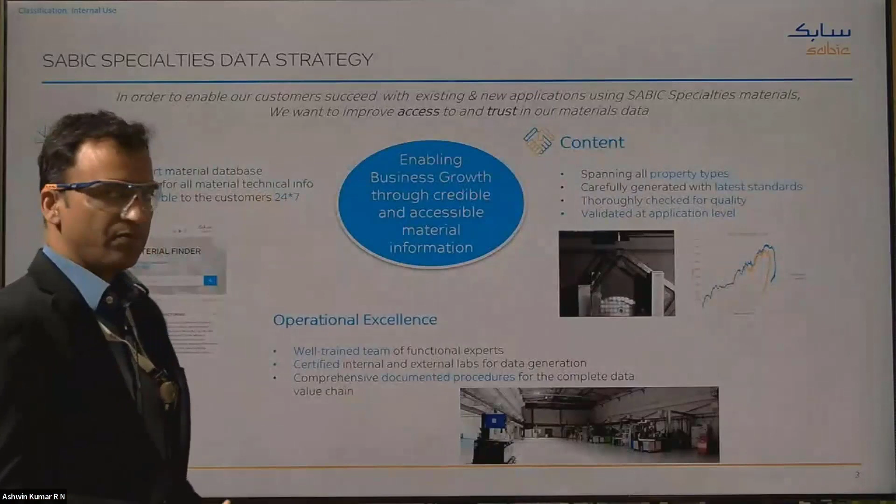Within SABIC, we have 4 main business verticals, and the vertical that we belong to is known as the SABIC Specialty business. This business is dealing with the high end of the resins, additives, and compounds. We have products like Ultem and Noryl resins and LNP compounds. In the specialty business, we have a very clear and focused strategy to really serve our customers' data needs.

The strategy is very simple: we want our customers really to succeed with their applications and our materials. And how do you do that with our data? It is by improving the access and trust in our data. So we have three clear strategic pillars to achieve this. One is to have the right system, to have the right content in the system, and have the right operational excellence.

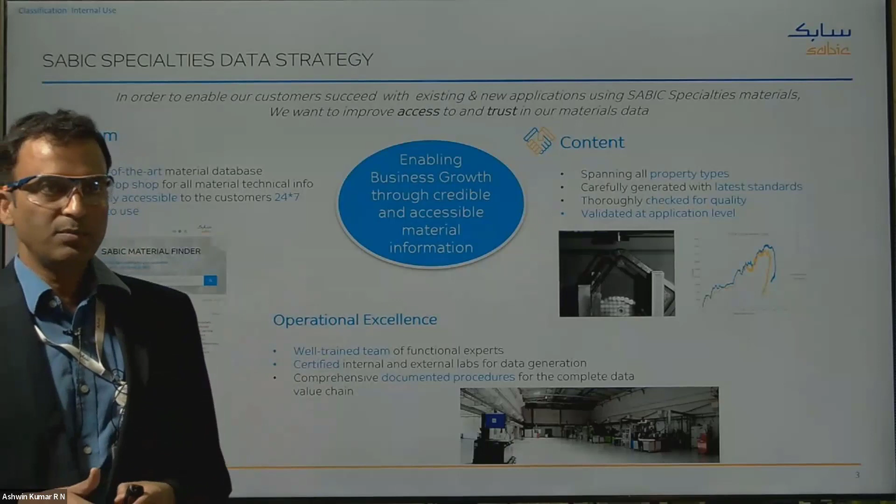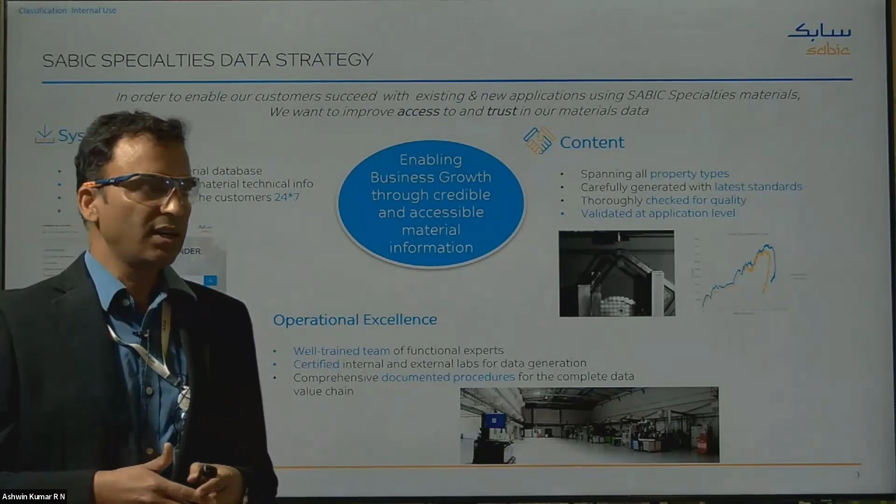For example, for the right system, we have a very state-of-the-art database which is called the Material Finder, which is accessible to all of you 24/7 through our website, where you can find all types of data, and this data is generated very thoroughly by the lab that we have here in Bangalore. This data spans all different property types, is carefully generated with the latest test standards, and it's thoroughly checked and validated even at the application level.

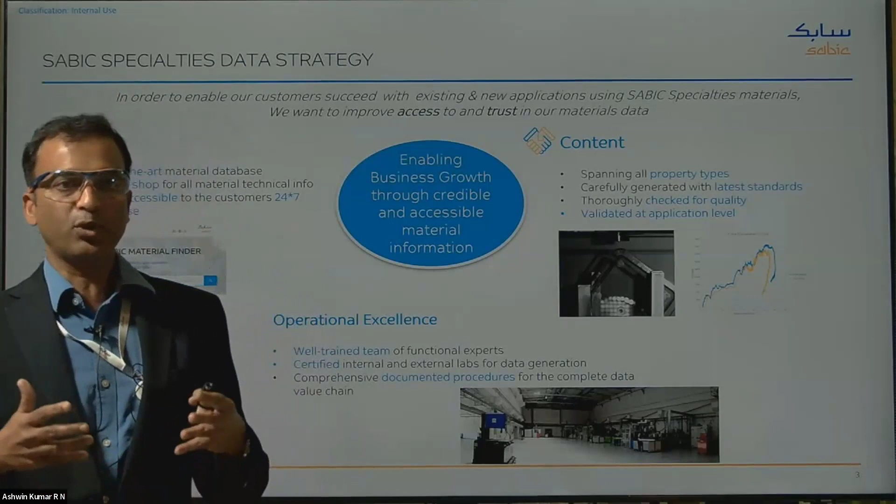And as far as operational excellence is concerned, we have a very well-equipped lab with very highly experienced experts who follow very well-documented operating procedures to make sure the data that you get is good for your simulations. As far as the Material Finder is concerned, I would like to tell you a few quick things about it. It's your one-stop shop to find the right materials for your applications from our portfolio.

So this Material Finder can help you to quickly search and find the materials using a lot of different types of easy-to-use search filters. You can also use a free text field to find the materials, and once you get the materials, you can also find out what are the different use cases that are possible with our materials.

I would recommend that you register on this tool to get more out of this portal. Once you register in the tool, you can get access to multi-point material data and the CAE cards, so that you can confidently do the simulations. In addition to that, you can also get molding guides, design guides, and secondary operation guides.

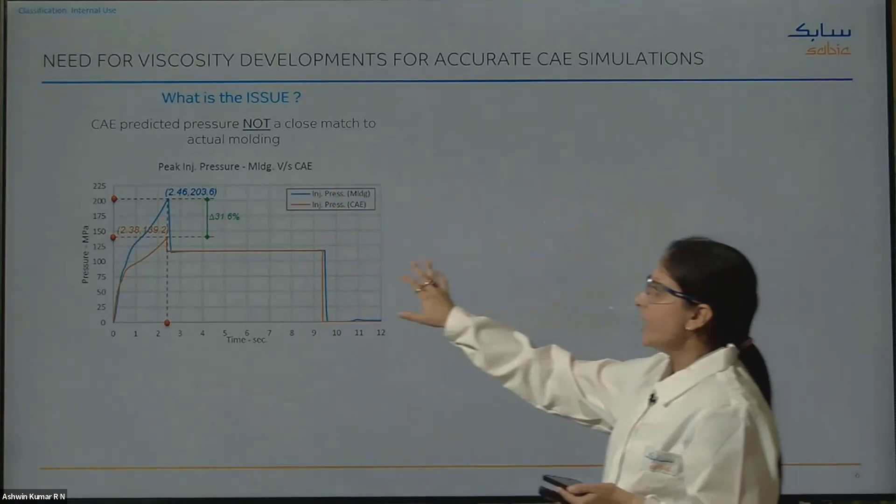So I'm talking about why we need viscosity developments for accurate CAE simulations. We have a graph of pressure and time, and the blue curve here represents the actual injection molding pressure that is experienced inside the injection molding machine in the cavity. And the orange curve represents the CAE simulated or predicted injection pressures.

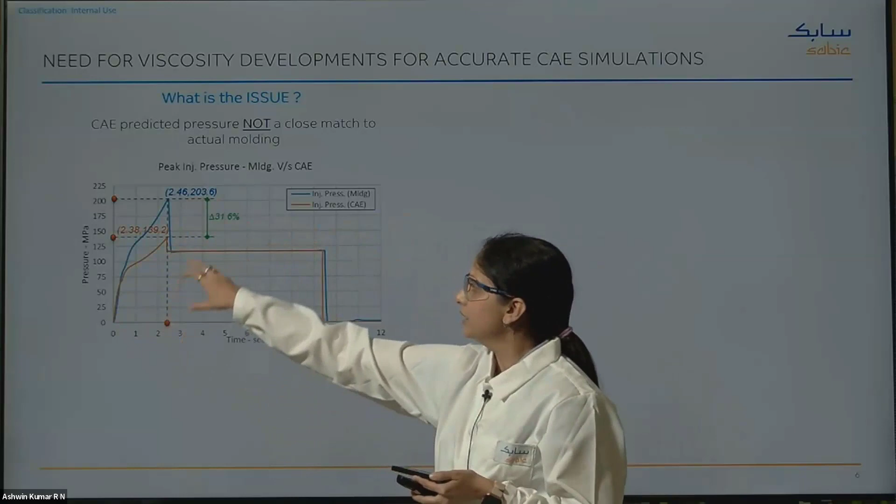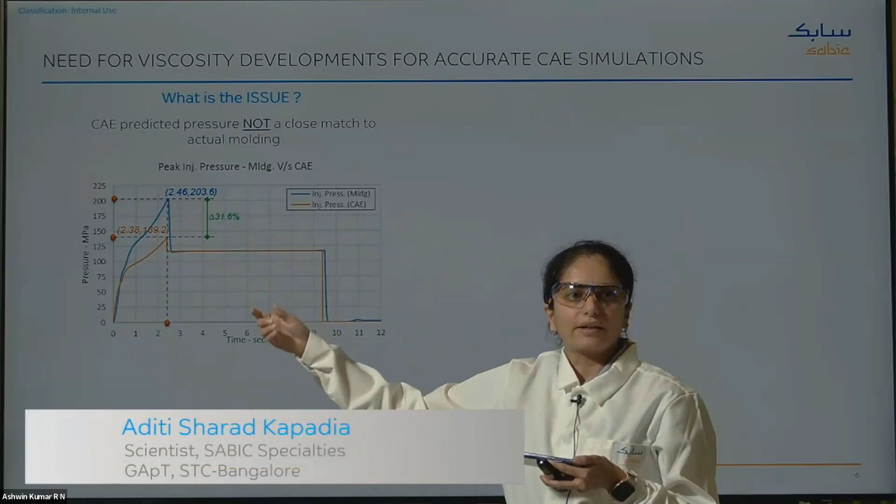We see that there is a gap between the actual injection molding pressure and the CAE predicted values, a delta of about 31.6%. So we need to address this issue in order to give a better prediction to our customers and enable them to have a better way of characterizing the injection molding pressures.

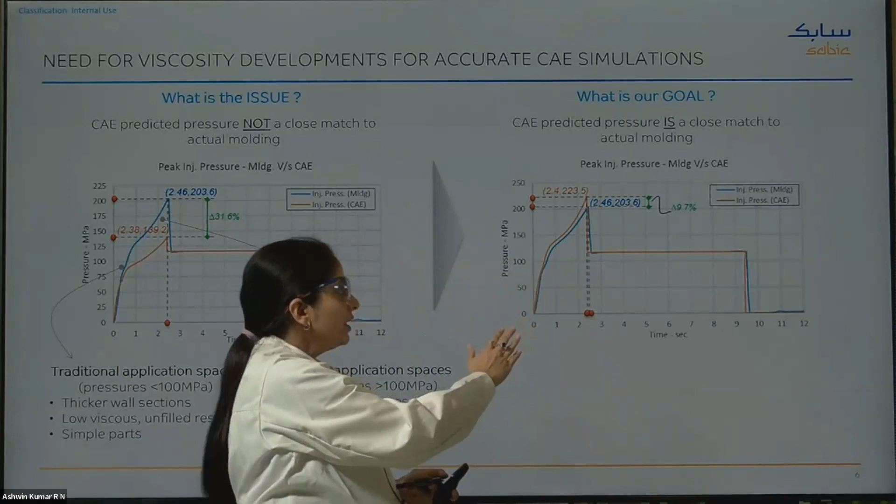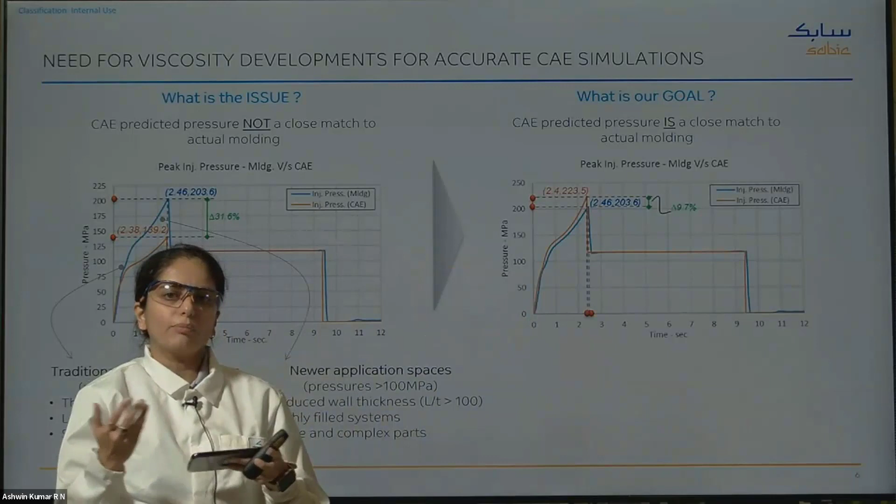So what is our goal? Our goal is that the CAE predicted pressures should be a very close match with the actual injection molding pressures which are experienced inside the cavity. So we have devised a method, and we know what kind of parameters will influence this. So we have come up with a methodology to show how we can bridge this gap between the actual injection molding pressure and the CAE simulations.

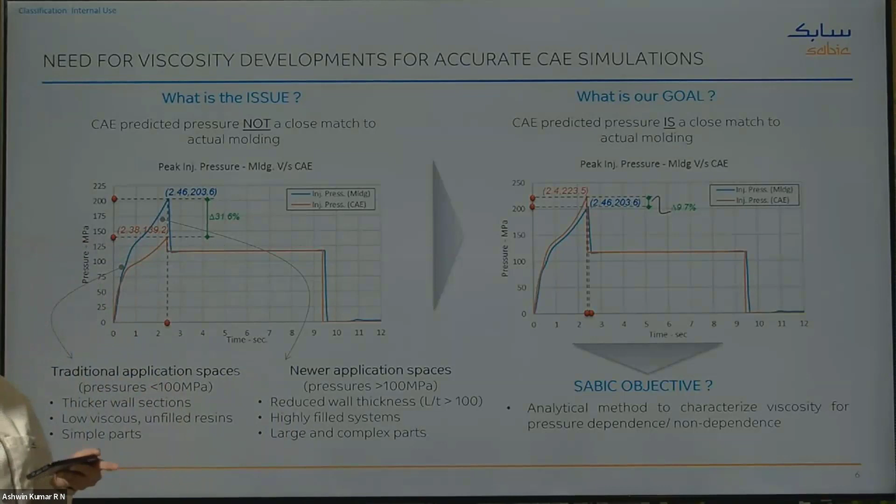So the question arises: where are these things important? When we have newer applications which require pressures greater than 100 MPa, which is not conventional, where there is reduced wall thickness, a highly filled system, or maybe large and complex parts, we need this kind of methodology to bridge the gap between injection molding simulation and the actual injection molding process.

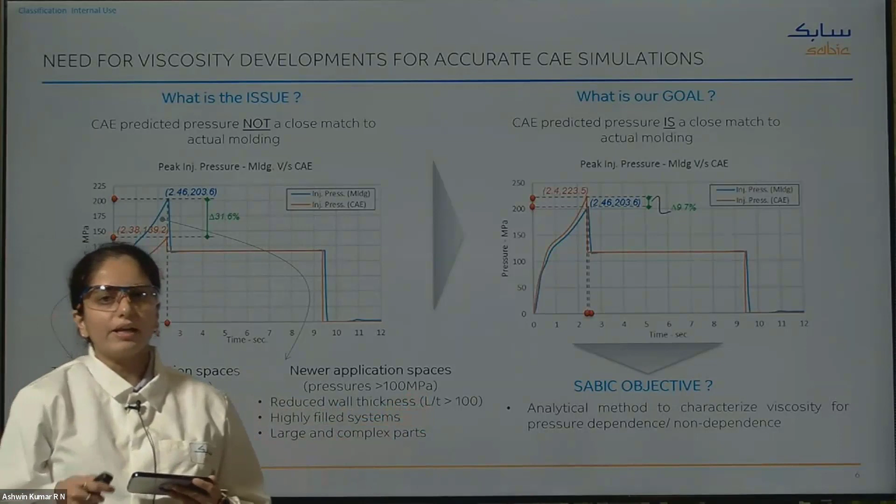So there is an analytical method available wherein we characterize the pressure dependency parameter, also known as the D3 parameter, which is a parameter of the Cross-WLF model widely used in injection molding simulation software. So it is very important to know the pressure sensitivity of the polymer melt viscosity, and this is required for an accurate CAE simulation, and we need to understand this for high pressure injection molding processes.

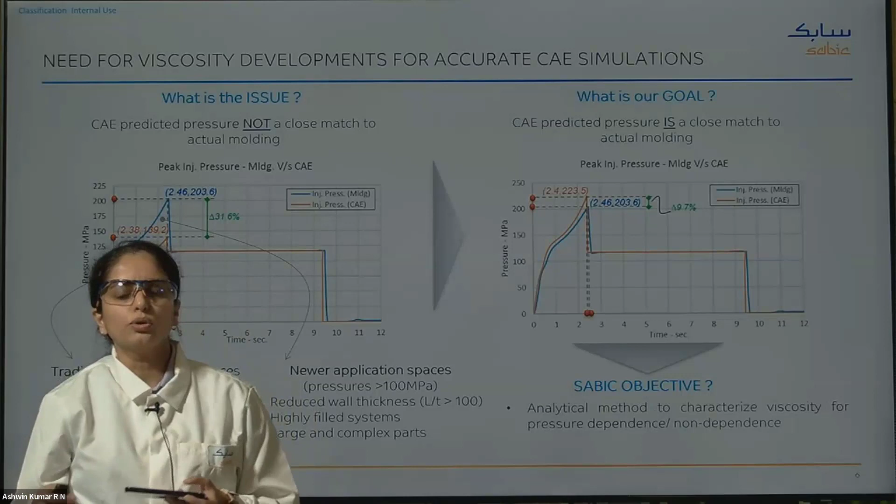So I will be covering the method to determine the D3 parameter in this webinar, and it is done by combining rheological techniques like the dynamic technique as well as the capillary rheometer technique. When both these techniques are combined, we can measure the D3 parameter. So what does the dynamic data contribute?

So dynamic data contributes to 6 out of the 7 parameters of the Cross-WLF model, and we need to have the 7th parameter, which is D3. So how do we go about that? D3 determination is done with the help of a capillary rheometer, which is fitted with a counter pressure cell, and this measurement is carried out so that we know the pressure dependence or the influence of pressure on

the polymer melt viscosity. The Cross-WLF parameters are then validated with the help of the injection molding process with a box tool, which will be covered by my colleague Ashwin, and then the results between the actual molding and the CAE simulations are compared. So a comprehensive rheological characterization is required in order to understand the influence of not only shear rate and temperature, but pressure on injection molding.

So the Cross-WLF model is widely used in simulation because of its simplicity. And what does the D3 parameter tell us? It tells us about the changes in glass transition temperature due to the applied pressure and the increased melt viscosity. In most material data cards that you will encounter, you will find that the D3 parameter is either missing or not evaluated at all. So how can we account for this D3?

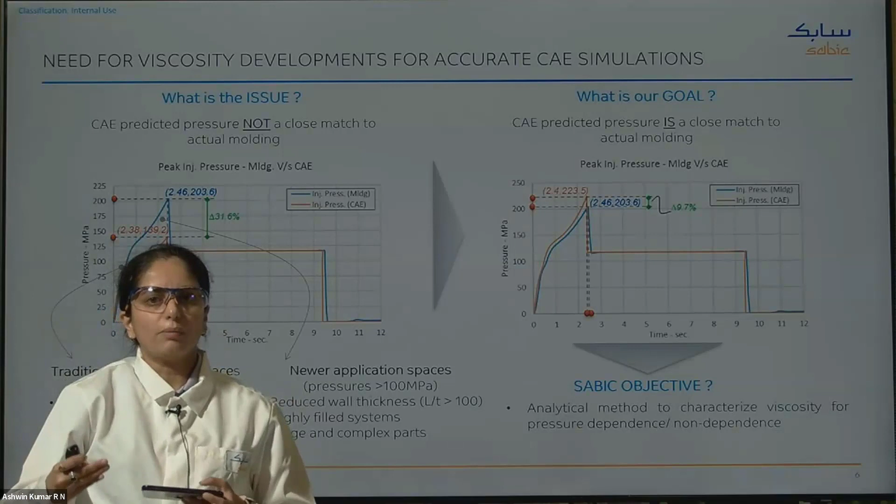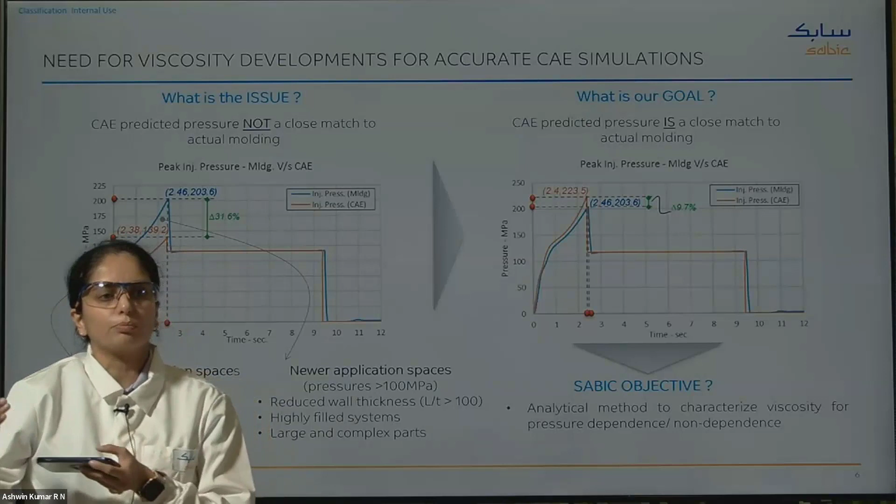So when we measure D3 and give this material data into our material card, what could we avoid? The customer would be able to select the right injection molding pressure limit for the injection molding equipment. He could choose the right machine for himself, and we could also avoid erroneous mold design, which could lead to part rejections, insufficient part filling or lower part performance. These things could be avoided when we account for the D3 parameter.

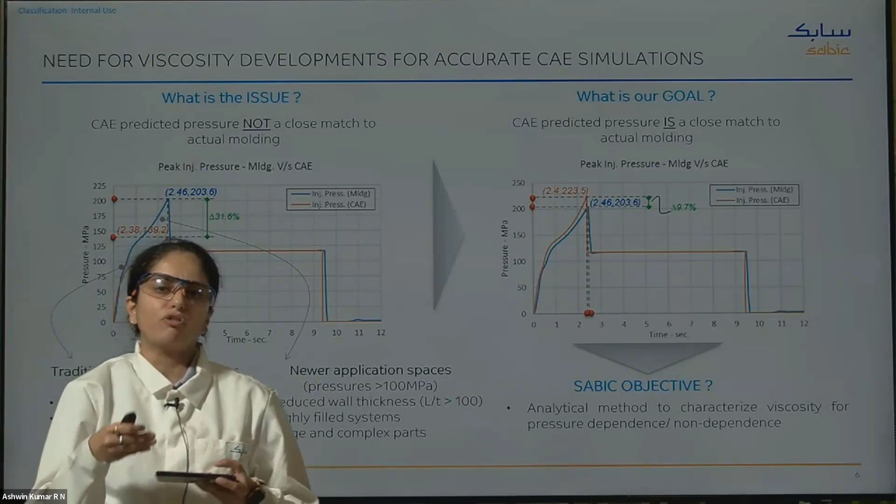So with the current method where we measure the D3 parameter, we see that the effect is a convoluted effect of pressure as well as of the high shear rates which are encountered inside the capillary rheometer instrument. So I'll talk about what exactly we are doing. Viscosity parameters at high shear rates are influenced by pressure, and we need to decouple the effects of pressure. If not, the results will be erroneous.

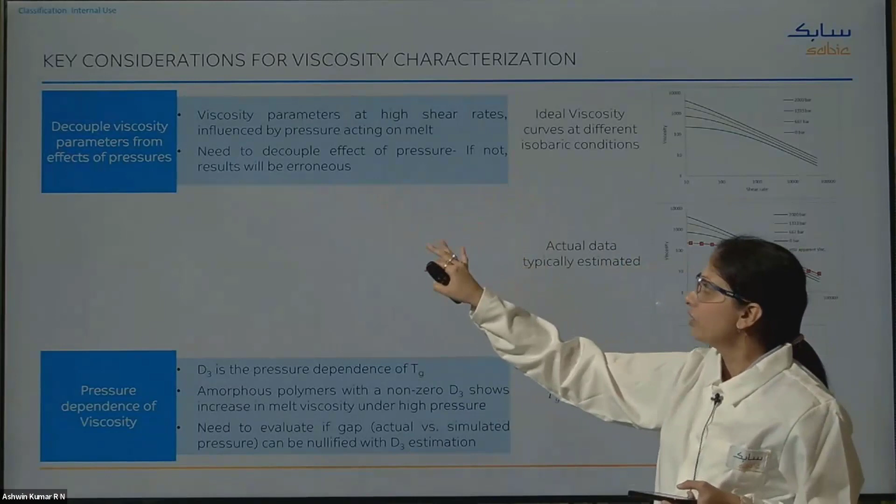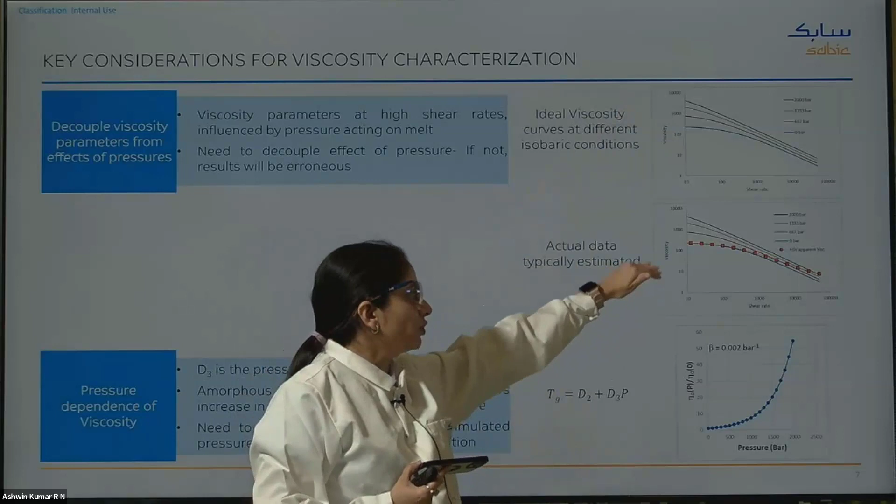So here we see a representative graph of viscosity as a function of shear rate measured at different isobaric conditions, where we have 0 bar, which is the ambient pressure, and then the higher pressures. We also have estimated data with apparent viscosity, which is converted from the measured viscosity. It is fitted onto the measured viscosities, and we see that it gives a good correlation.

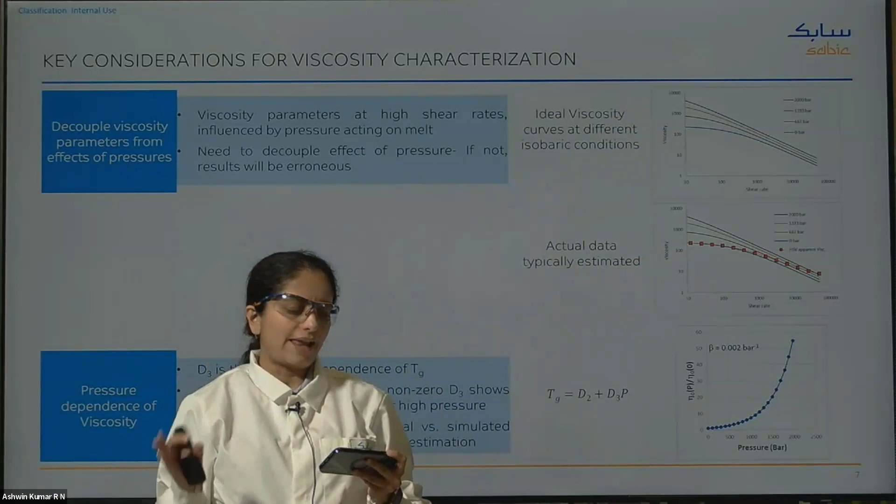So what exactly do we do to determine this D3 parameter? Currently we have a method to address this effect of decoupling the shear rate from the pressure during characterization. Dynamic rheology is used to measure the viscosity at 0 pressure, and the polymer must fulfill 2 conditions. The first condition is that it should follow the time-temperature superposition principle, wherein you can generate complex viscosity master curves.

And the second condition is that the polymer needs to follow the Cox-Merz rule, which is a simple relationship wherein we correlate the steady shear viscosity with the complex viscosity as a function of the angular frequency. So by achieving these 2 conditions, that is the Cox-Merz rule and the TTS, we can have this D3 characterization.

And I would also like to touch upon the WLF model, which mostly describes the effects of temperature on viscosity. In an injection molding process, when the pressures are above 100 MPa, we need to account for the increased Tg, the reduced free volume, and the effects of pressure. So combining the WLF and the Cross model, the effects of temperature and pressure on the zero shear viscosity are accounted for, and then the effect of shear rate, which leads to the shear thinning of the melt viscosity.

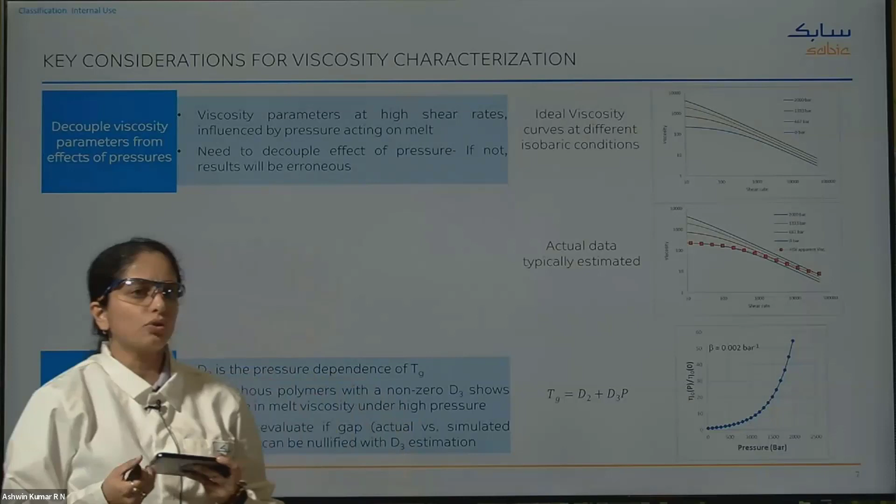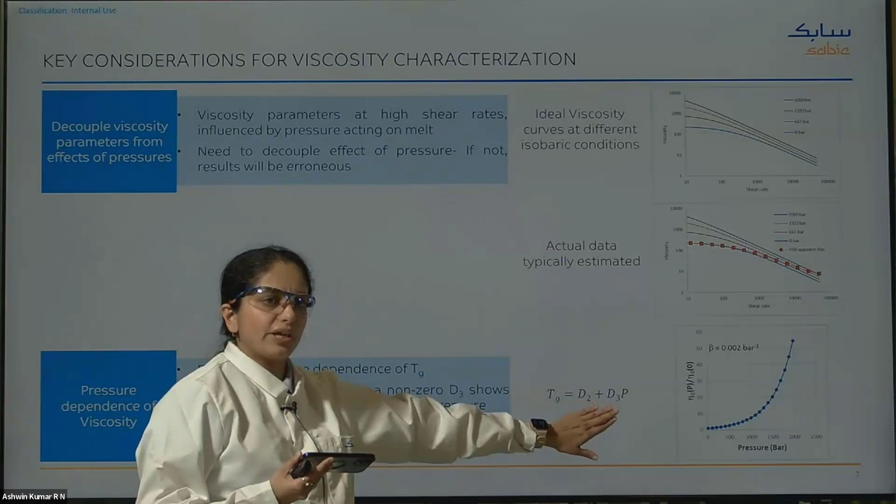So all this can be correlated with the help of Poiseuille's equation, which is generally used to measure the pressure gradient inside the capillary rheometer. So in short, we are accounting for the glass transition temperature, that is the D2 parameter of the Cross-WLF model, and we are adding the D3 parameter along with the pressure component. So we are now considering both the pressure dependence of Tg and the glass transition temperature itself.

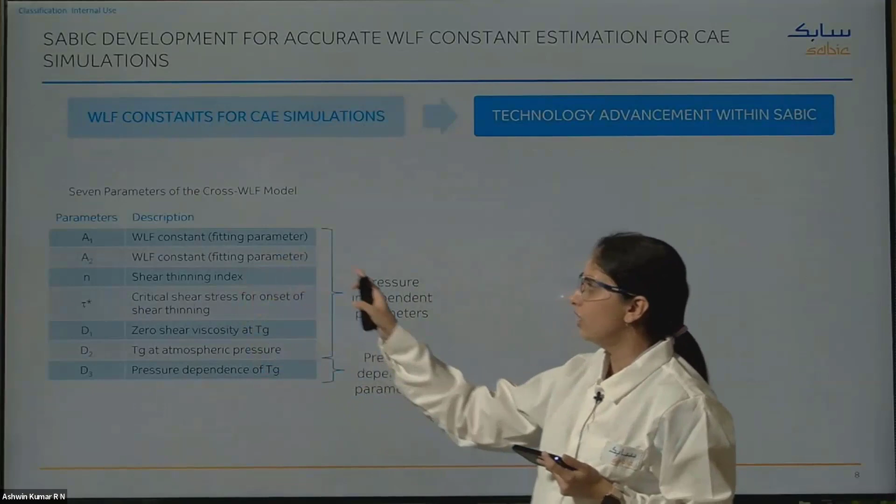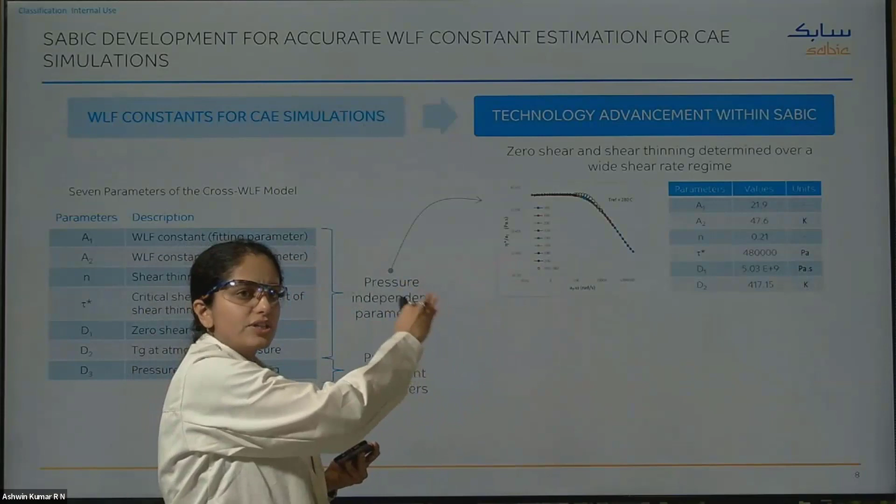So this is how we will cover both the factors. And then we talk about the 7-parameter Cross-WLF model, what each constant means. The meanings have been given on this slide. And then we have this master curve, which is generated at a particular reference temperature, first different temperatures and then a reference temperature. And then we have this methodology to determine the D3 parameter, wherein we have the pressure gradient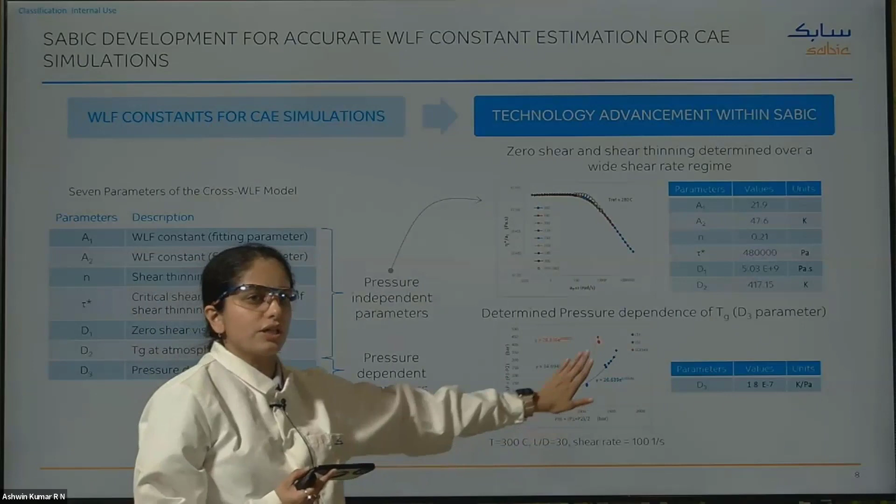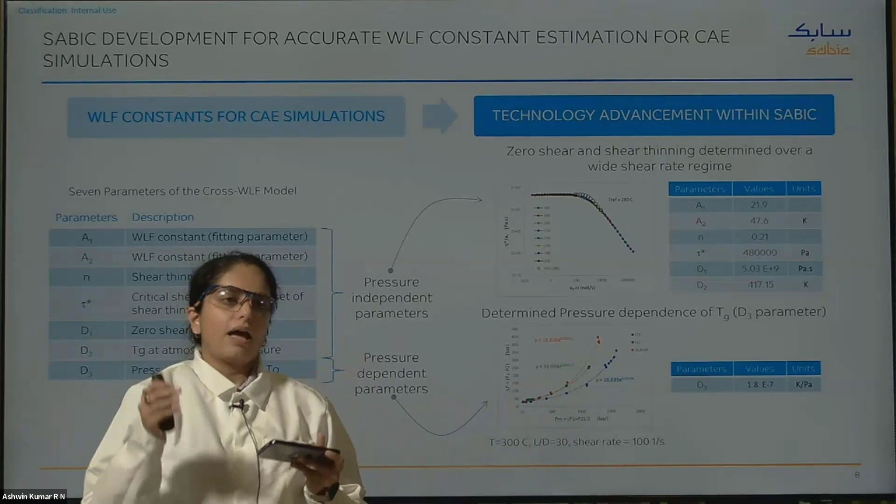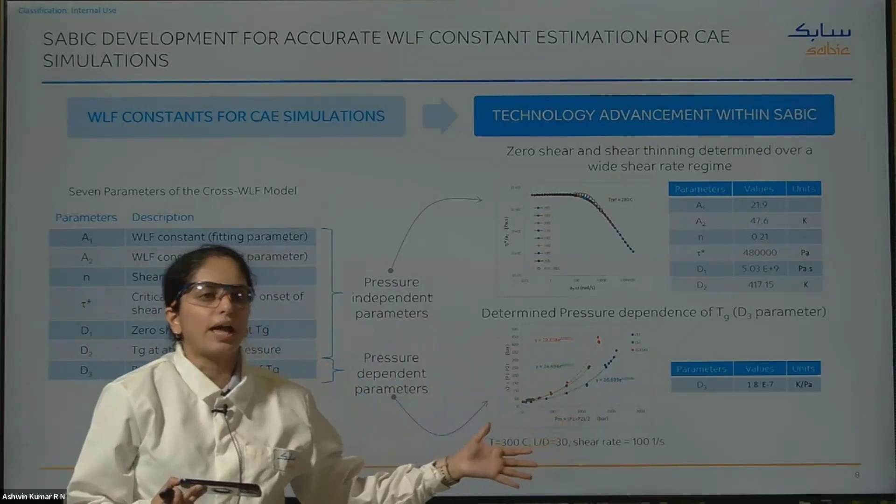versus the average pressure. And we see that the melt viscosity is influenced by pressure. So it goes on rising continuously. So we have this counter pressure measurement device wherein we capture the influence of pressure on viscosity, and this is done at a constant shear rate of 100 per second, which is in the Newtonian region of the polymer melt. And this is applicable for the amorphous polymers as well. And then we can characterize our pressure dependence coefficient beta, which leads us to the calculation of D3 parameter, which is given in this slide here.

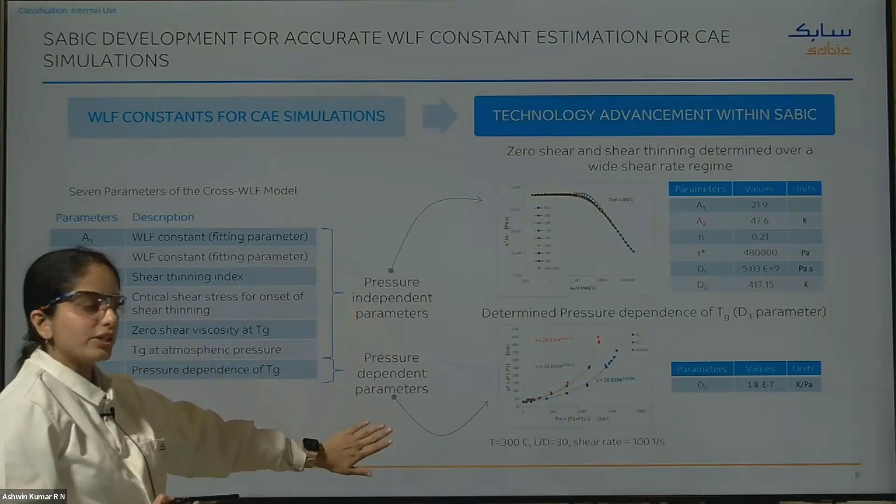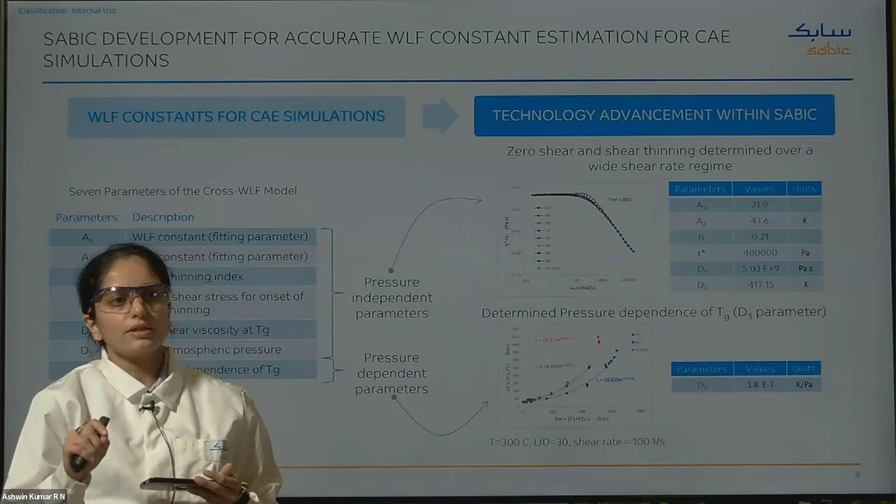So I would like to summarize here that the effects of pressure and shear rate can be decoupled, and then we can have our D3 parameter evaluated. There are some pressure independent parameters and pressure dependent parameters, and we can arrive at the 7 parameters of the Cross-WLF model and provide more complete data in order to characterize the CAE predicted injection pressures and the actual injection molding pressures, and we can bridge this gap by about 10%. So this is our finding, and I would like to hand over this stage now to Ashwin to explain the further molding validation studies. Thank you.

Thank you, Aditi. Very nice. Thank you, Aditi. Just a quick mic check here. I hope everything is working fine. Sounds good.

My name is Ashwin. I'm an application development engineer in SABIC Specialties business, focusing on part design, tool engineering, and the molding process engineering. Today, I'm going to demonstrate the molding process from where we took the boundary conditions into the simulation environment and try to understand how it correlates. And helping me today is my colleague here, Senthil, who is an expert in the injection molding process. So today we are molding Ultem 1000, which is one of our products from the high heat portfolio, which can retain its mechanical properties even at high temperature.

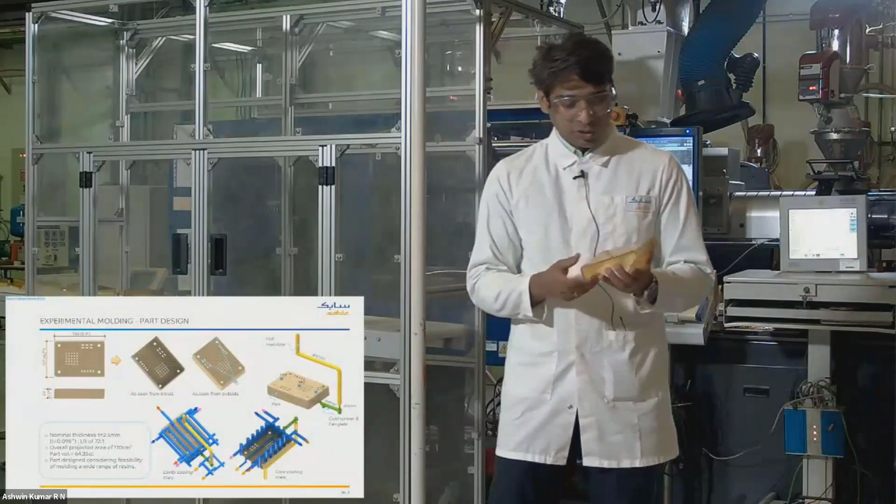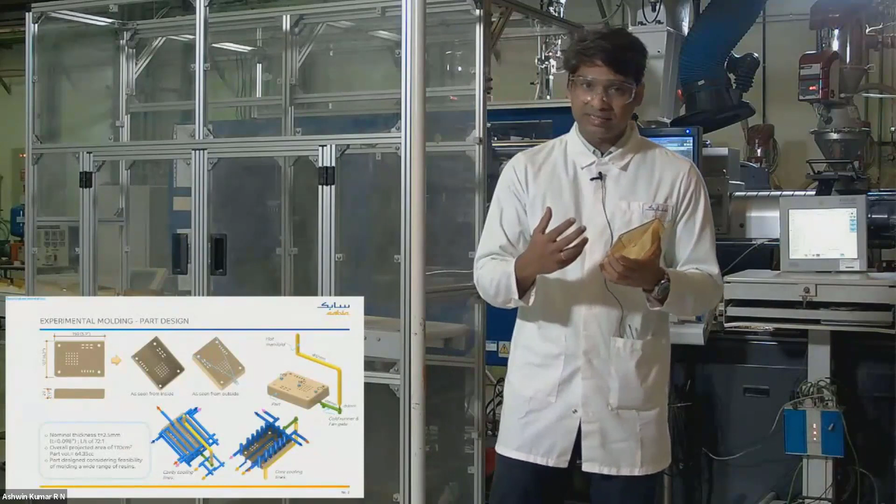So let's quickly jump into what's happening here in our lab, right? So to understand this molding process, we have come up with a representative design of the part. That's what I'm holding here in my hands today. So this is a kind of a boxy shape with one side open, as you can see here. And we have intentionally designed some flow restrictions to understand how the viscosity of the resin influences the filling pattern because of these restrictions. And this is about a uniform 2.5 mm thick part with about 220 by 160 kind of a length.

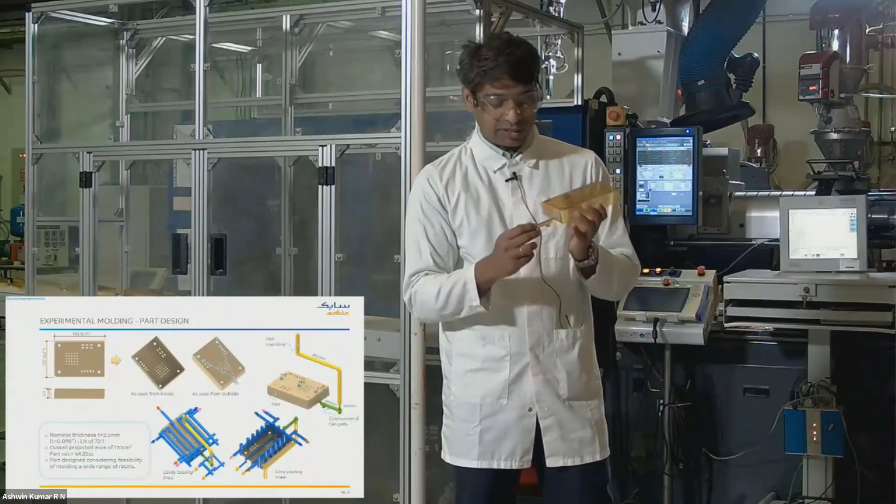And to mold this part, we are using an edge gate kind of a scenario here, which is basically a combination of hot and cold runner. And you see we have a decent edge gate with a trapezoidal shape of runner with a small cold sprue, which is fed by the hot runner, right? And another important thing I want to highlight: while we were developing the tool for this design, we have given a lot of emphasis to make sure that the part forming surfaces in the tool are maintained at a very constant temperature, right?

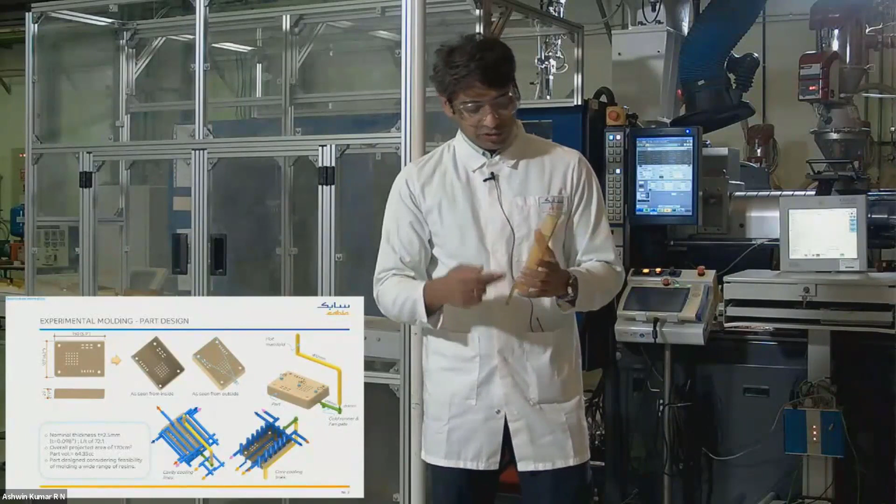So for that, we engineered the cooling channels in such a way that the temperature variation between the two halves of the mold and also even at the same side of the mold is less than 1 degree, right? So for that, you can just look at the screen, the small screenshot there. So there are baffle coolings within the core, and surrounding the core is another cooling channel. And on the cavity side, there are additional 2 cooling channels which are trying to maintain this temperature altogether.

And another important thing I want to highlight here is maintaining the temperature at the hot runner. So we have a separate cooling channel designed in the tool to maintain the steel close to the hot runner at a nominal temperature, and we connected it to the separate MTC, which I'm going to show you in some time. This is really helping us to make sure that the temperature distribution is uniform in all of the mold. So with this, let me quickly show you how the tool looks here. As you can see, the molding is happening here, and we're going to interrupt it to just show you how the tool design is.

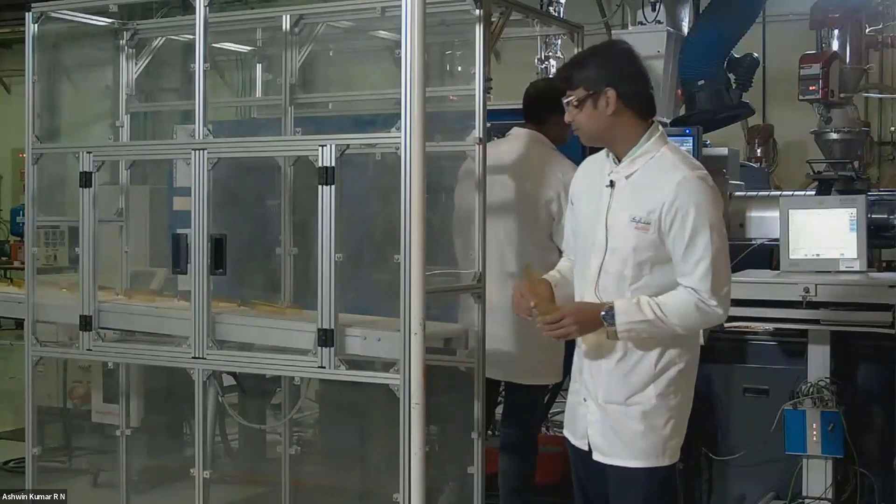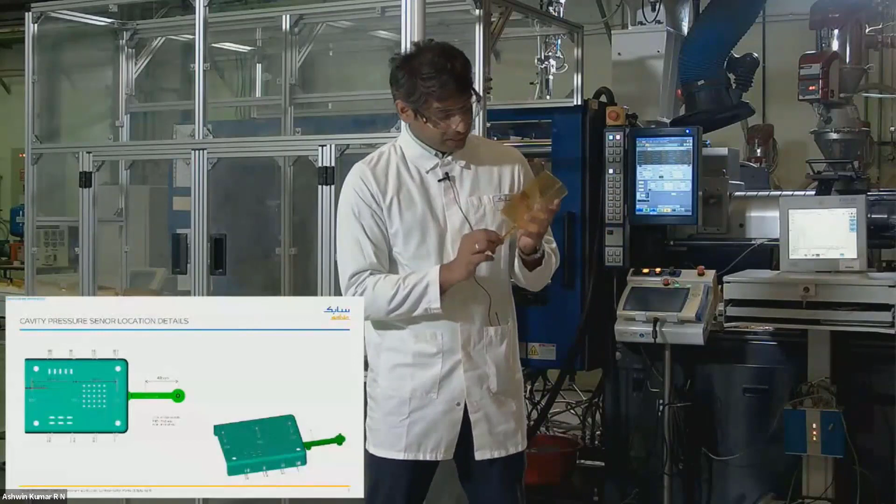While we are finishing with the shot cycle there, I want to highlight another feature where we have instrumentation designed in the tool to understand how the pressure changes are happening. For that, we have 4 pressure transducers in the tool. One of them is at the runner, the one close to the gate, one at the middle of the part, and one close to the end of the fill. So let's quickly check out the tool. How does it look?

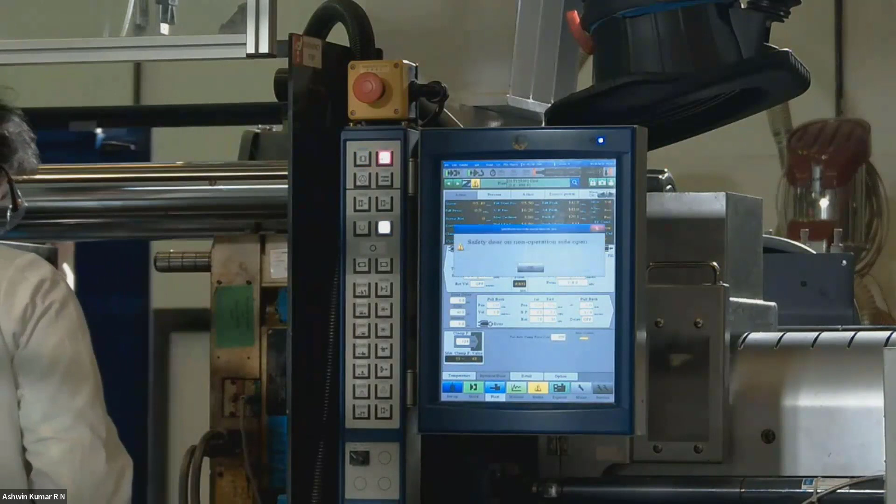So this is the tool here, team. This is a conventional 2-plate mold with the core on the moving side and the cavity on the fixed side of the part. And this is how the part is ejected from the cavity side. And I want to highlight the 4 pressure transducers which are on the cavity side here on the surface, monitoring how the pressure is varying.

Now, this gives us a lot more insight into the molding process to understand how the pressure varies as it is filling, and what's the compressibility of the material. It will also help us understand how the different regions are shrinking. This influence is given by how the pressure profile is decaying inside the mold, right? That is something which I'll demonstrate in some time. So this is the tool structure we have here, and let's start the molding process, and I'm going to introduce the molding infrastructure setup from here now.

So before I start off with understanding the process, I just want to introduce the molding infrastructure here. What I have here is a Sumitomo make, all-electric, high-speed, high-pressure machine. On the clamping side, it can deliver 130 tons. And on the injection side, it's a 36-dia screw with about 140 grams of shot weight. It can achieve screw speeds of 360 mm per second, and the pressures can go up to 290 megapascals on this unit.

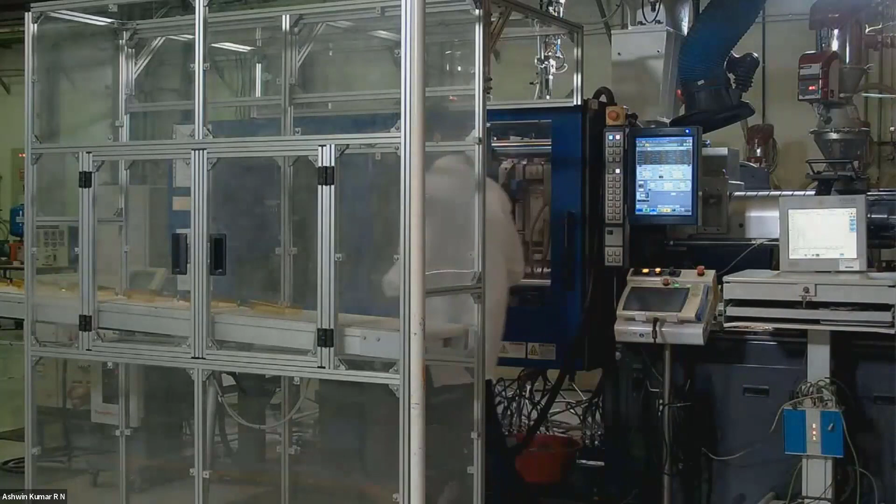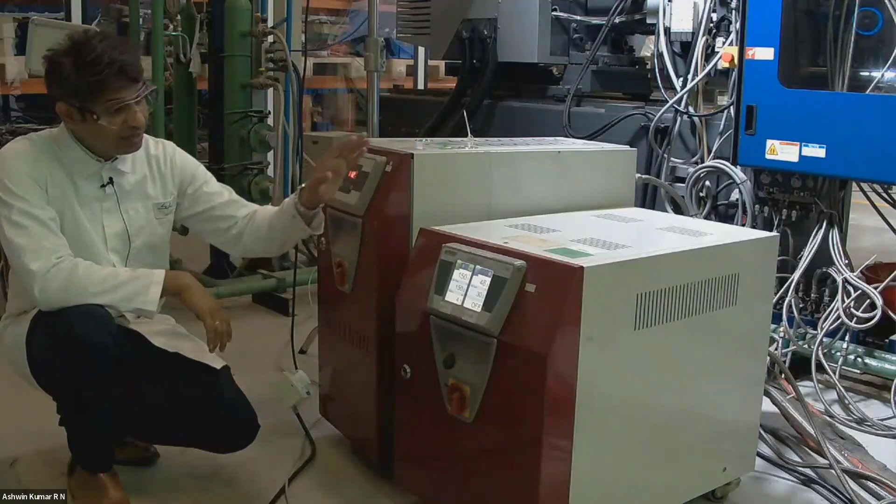So this is the MTC setup I have. As I highlighted, there are 2 different MTCs which we are using today. One of them maintains the temperatures on the core and the cavity side. And I want to highlight another important feature here. We have not looped any of the cooling channels between the in and out. What we do is use the manifold to make sure that equal flow rates are going into each of these cooling channels.

And another MTC is wholly and solely used to control the temperatures near the hot tip. That's why we are using a separate MTC here. And for molding Ultem, we are using 150 degrees C as the mold temperature, and about 110 to control the hot runner region close to it.

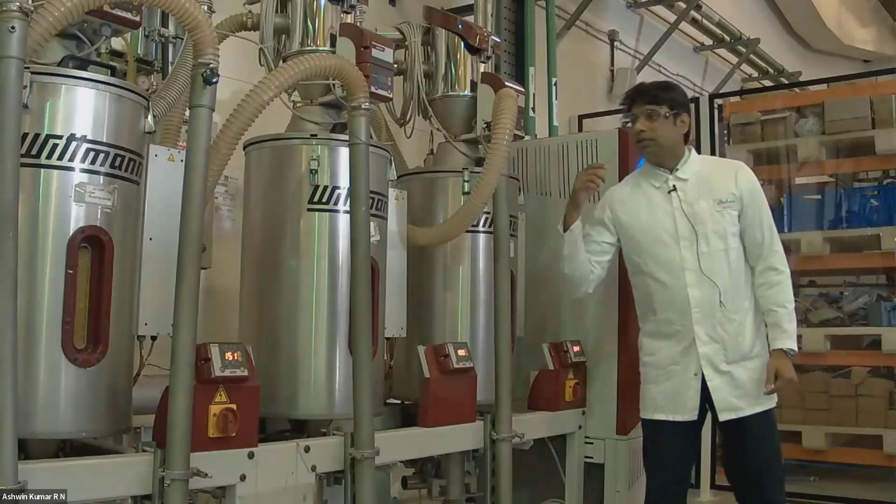Now, this is the dryer system we have. It's a completely closed loop dehumidifier kind of dryer. We have been pre-drying Ultem at about 150 degrees C for about 4 hours. And as you can see, these have about 50 liters of capacity.

And I want to highlight the feature here. From the dryer to the machine hopper, it's a completely closed loop system wherein the material is automatically conveyed into the hopper, to have a streamlined, non-stop auto cycle molding process. Now, let's quickly go back to understand the other setup we have here.

I want to highlight another important unit. What we have here is the Kistler pressure transducer acquisition system. Basically, what we have here are the curves monitoring the pressure inside the cavity and reporting it out, right? So let's look at the molding cycle and how the pressure changes when we are reviewing the pressure profiles from the molding machine itself.

So now, to arrive at a robust molding process, we have employed scientific molding techniques. I'll try to take you through some of the steps of how we arrived at this process optimization, to make sure that the assumptions from the simulation are really being correlated here.

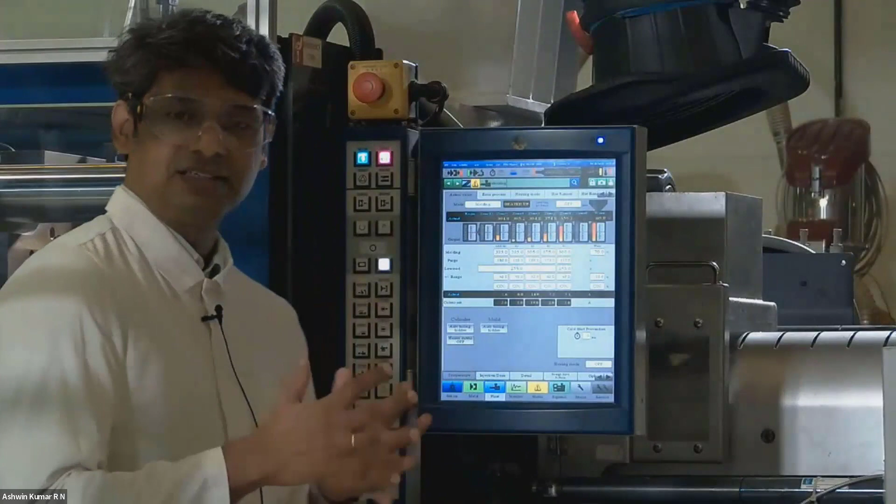I'll start off with the temperatures. We start to set the barrel temperatures as recommended in the data sheet, in the mid-range. The same goes for the mold, where we set it for the mid-range of the data sheet recommended values. As you can see, it's 390 set in this barrel profile here.

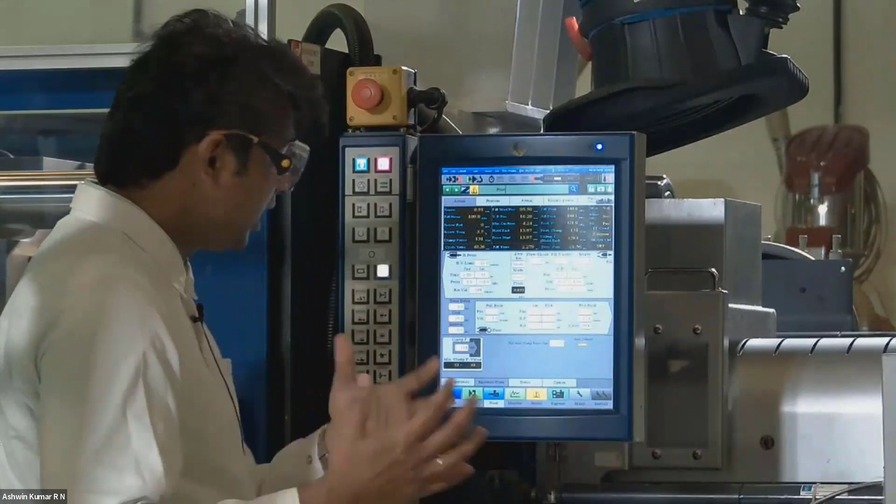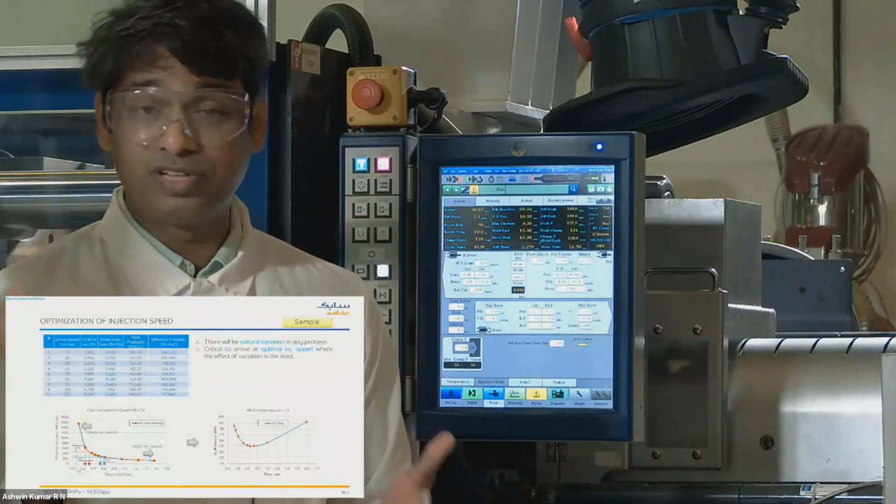And to highlight the filling part of it, we have employed in-mold rheology to understand what is the optimum fill time or the fill rate with which we want to fill the part. Now in this, we fix the screw start and the screw end position, and we keep changing the screw speed and monitor how the pressure is changing.

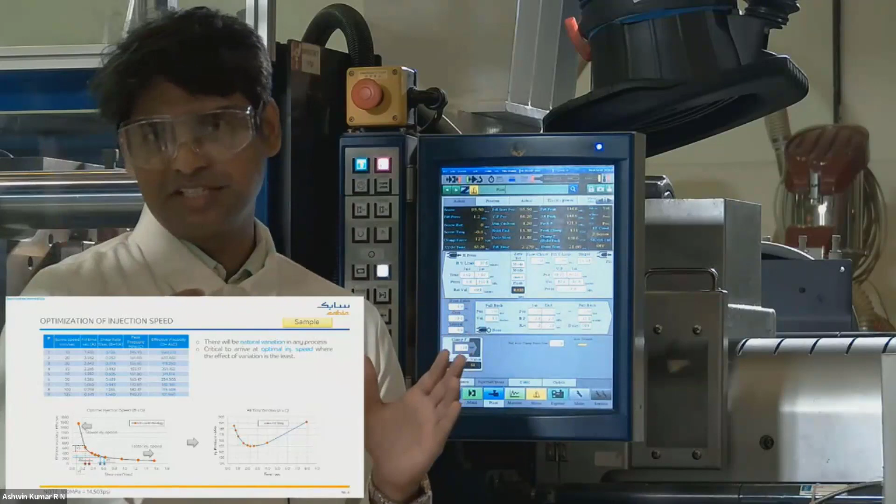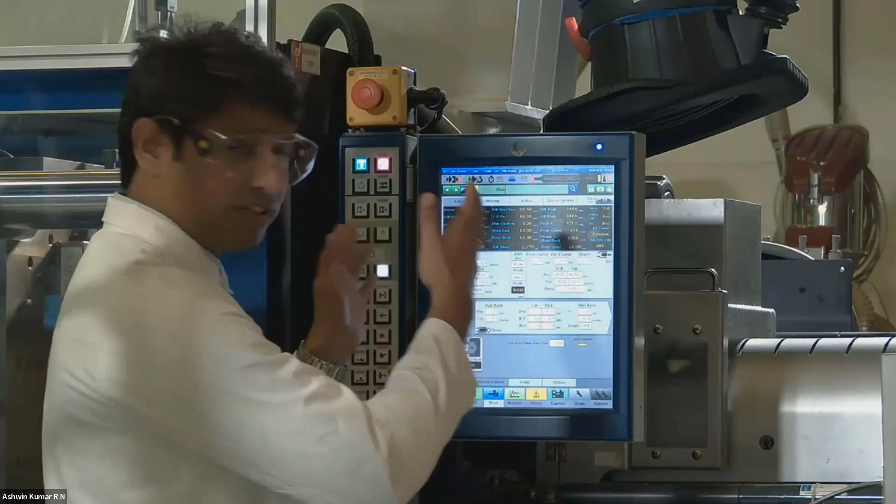And for the packing stage, what we try to do is basically understand the gate freeze and make sure that we have enough window there to pack the part out. Now in this case, the gate freeze happens at about 5 seconds of packing time, and the packing pressure is something which we estimate on the basis of a cosmetic processing window.

We don't want to be at the higher side of the pressures wherein we are flashing the tool, and we also don't want to be on the lower side wherein we are seeing waviness or not a good surface replication from the cavity. So from that, we see about 110 megapascals is what we have set as a holding pressure.

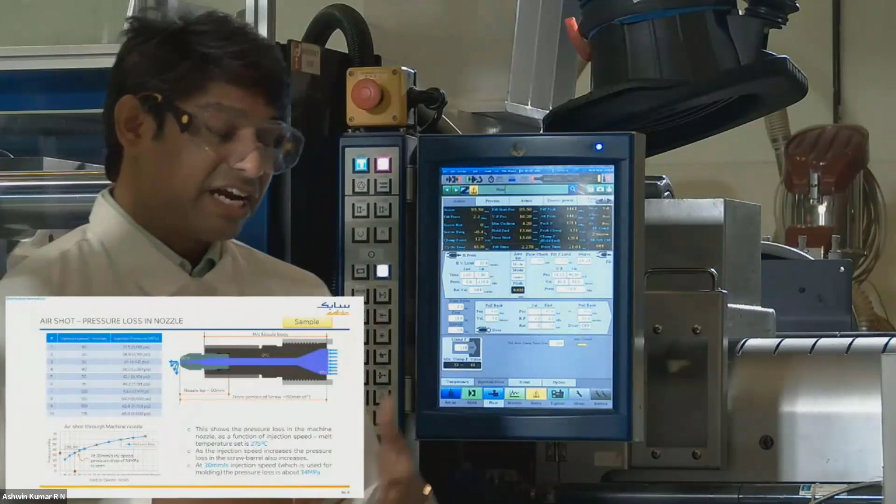And another thing I want to highlight on the dosing stage, the refill stage: the back pressure and the screw RPM are also really important to make sure that there are not many variations happening in the melt temperature when it's prepared in the barrel.

So for that, we are using a 50 RPM screw speed with 2.2 megapascals of back pressure. That is resulting in about 21 seconds of dosing time, which is still under our control limit of cooling time. And also I'm getting an additional 15 seconds of dwell time where the melt temperature actually stabilizes. So with these boundary conditions, let's look at what is the output we usually monitor.

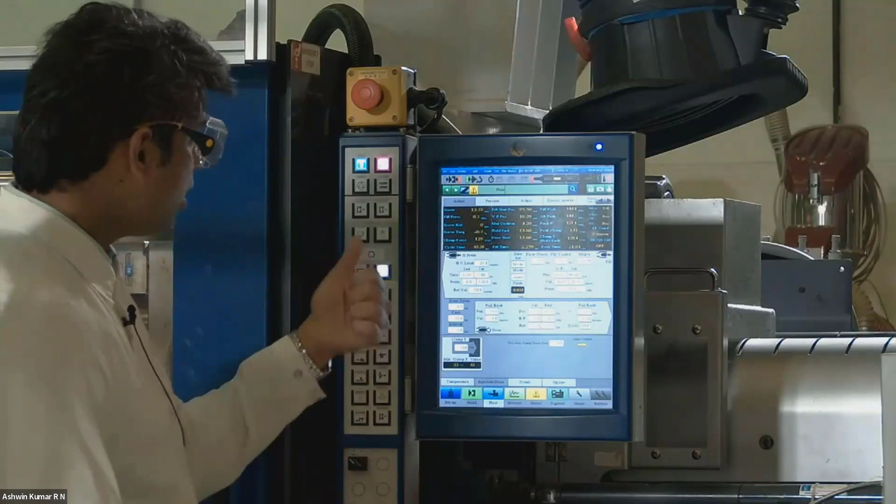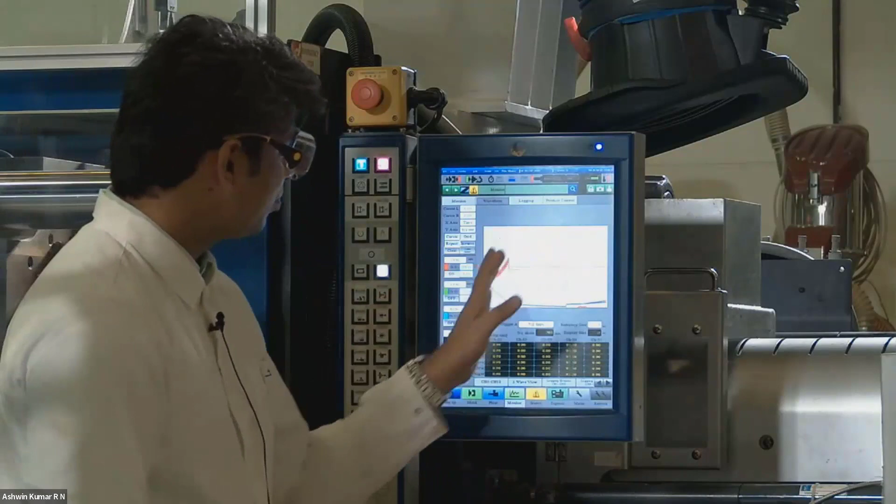Some of the typical outputs we monitor are the fill time, the cushion, the refill time, and also the peak pressure. For this molding process, let's quickly look at the pressure curves we are seeing here. So what you see here on the screen is the pressure curve, which is a result of the boundary conditions we have used in the molding process.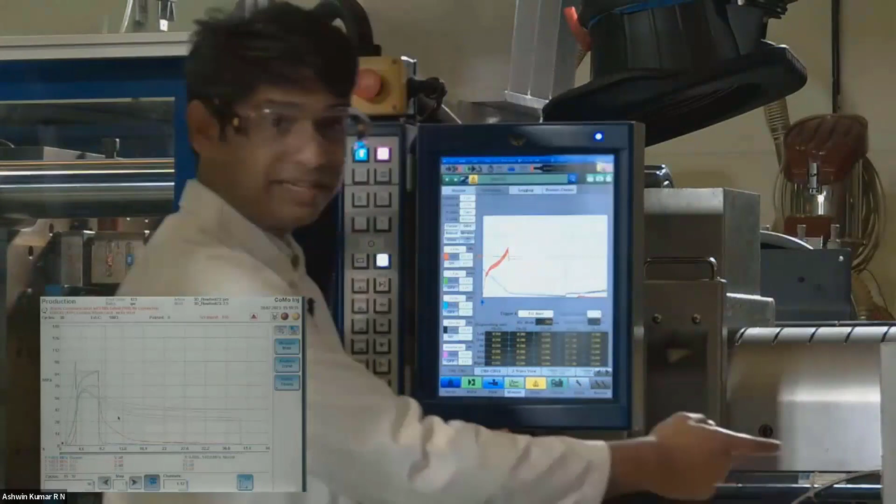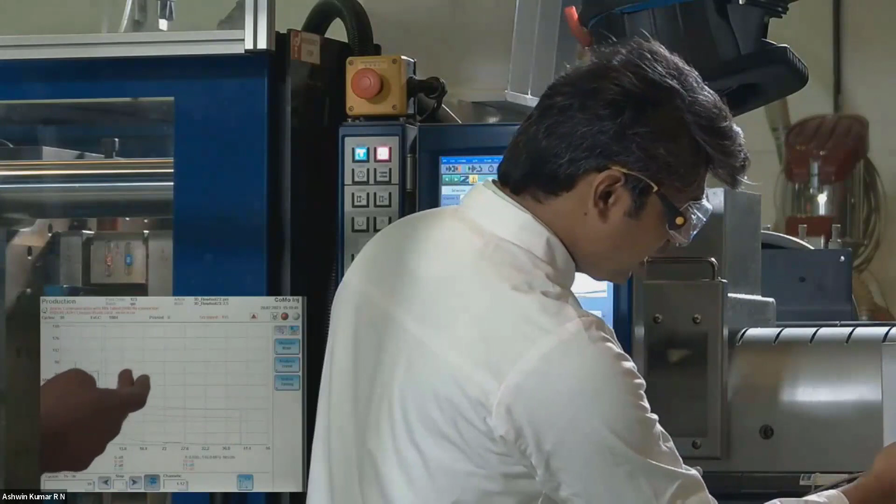And this is the pressure curve you see Peter comparing in simulations for one of the ULTEM grades we are molding today. Now, as a response to this, what we have additionally is from the pressure acquisition system from Kistler. These are the pressures from 4 different locations in the tool: one is at the runner, close to the gate, mid, and end of the fill. This is also something which Peter has used in his simulation to understand the pressure correlation with the analysis.

So with this kind of optimization and a robust process established, we make sure that it is being run for a minimum of 30 shots or about 30 minutes to ensure that the process is stabilized. All the process outputs are within the consistent range of what we're expecting.

And that is where we extract the data from these molding machines: the pressure curve from the machine and the sensor curve from the Kistler acquisition unit. That data goes to the simulation to understand the correlations with the material data characterized by our experts here and the molding process used from this setup. Now let's look at how the simulation results look with the SolidWorks system. So Peter, it's all up to you now.

Okay, guys, can you hear me? Yes, we can hear you. Okay, very good. Well, Subhranshu, Aditi, Ashwin, thank you for that. Can you see my screen? Okay.

Andy, can you see my screen? Yes, Peter, I can see your screen.

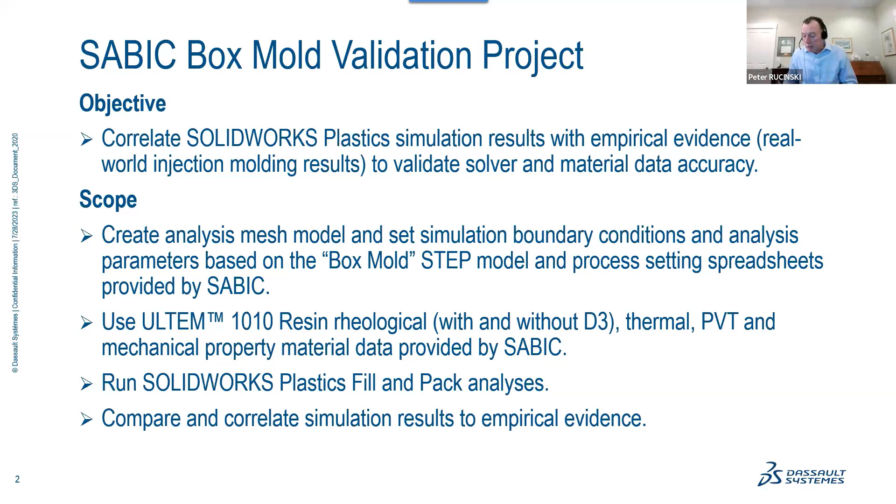Some of the steps that we take behind the scenes: you saw Ashwin describing the part geometry. You have the box cavity with a fan gate fed by a cold runner system. That cold runner system is fed by a hot runner system. And for this validation study, we actually model all the way back to the nozzle of the injection molding machine, which is a perfectly valid thing to do. If you think about it, this is basically where flow starts. And by modeling all the way back to the nozzle, you can get finer or more granular detail in your correlations.

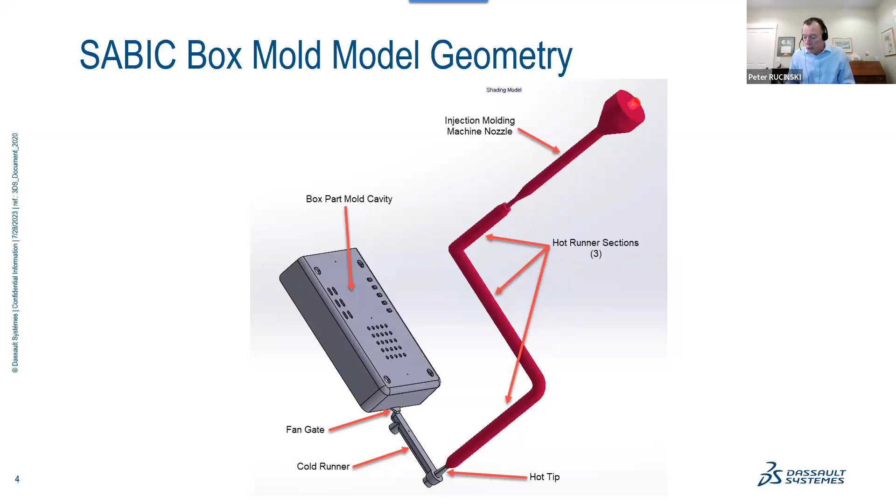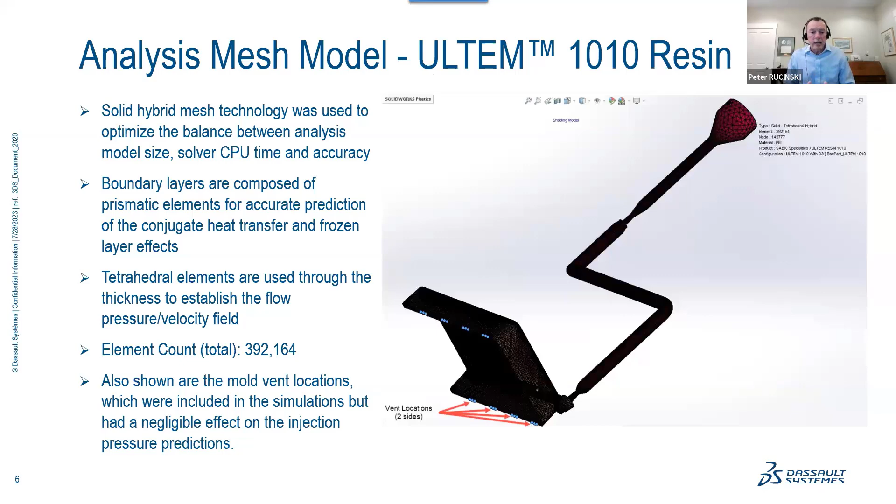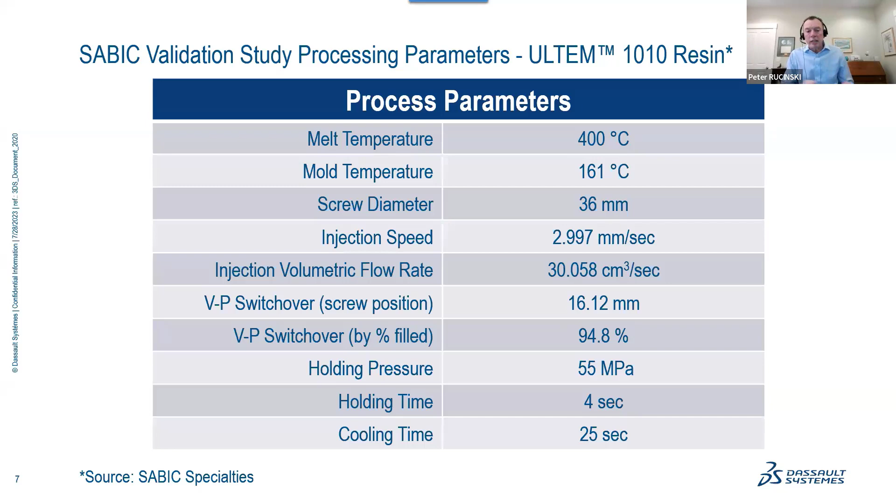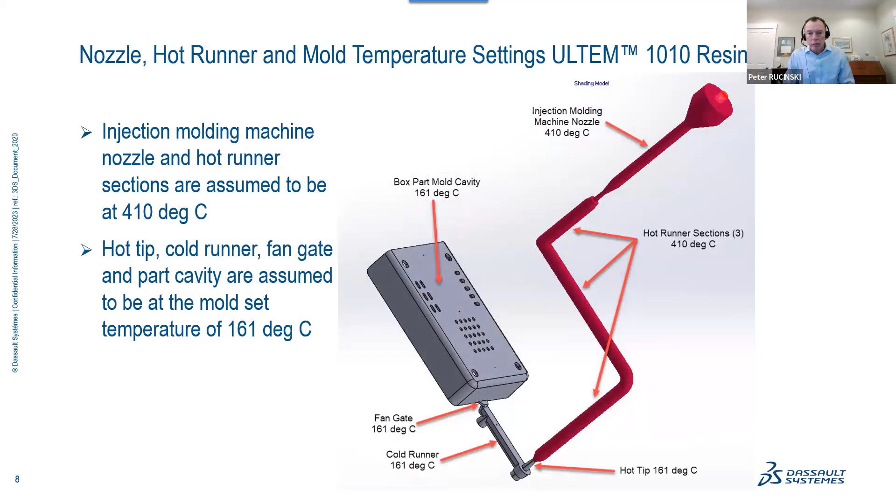Of course, we're taking all the material data, which Aditi covered. We're relying on SABIC for that material data. We then take their model geometry and generate our mesh model inside of SOLIDWORKS Plastics. In this case, we also did a venting analysis where we included the vent locations just in case they had a significant effect on the pressures generated inside the mold cavity. We take the process parameters coming from SABIC's injection molding machine in their laboratory and translate that into the simulation process parameters that we use to set up the analysis. Here you can see the hot runner and the mold temperature settings that were used for this validation study.

And now we can start to dig into some results. We did run this for two different materials, Ultem 1010 and Ultem 1000. Today, in the interest of time, I'm just going to present the results for Ultem 1010, but rest assured that we got equally good results for the Ultem 1000. Now, in terms of injection molding simulation, the first plot that we always look at after we run any analysis is the animated plot of the filling time. And this is, in some respects, a simple sanity check.

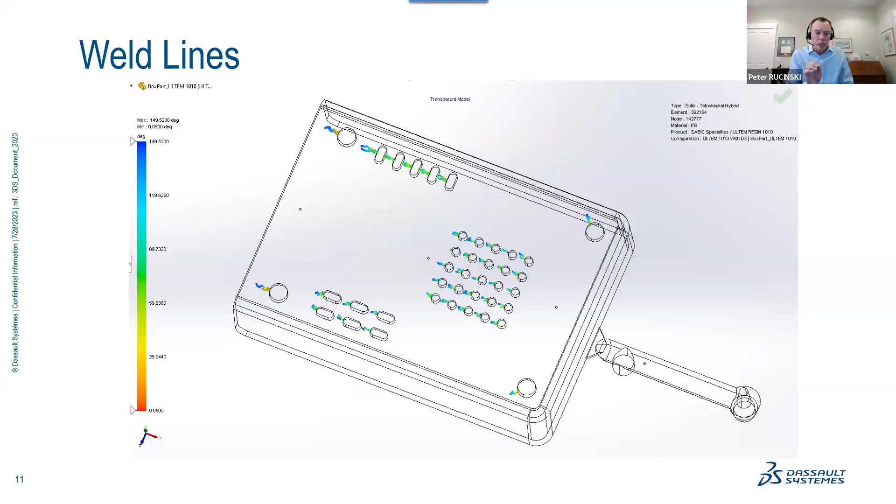So all of these through holes that you see here, we're picking up the weld line prediction on all of them. And some might look at that and say, well, that's a relatively simple and easy thing to do. I would say not so much, because without going into all the detail of predicting weld lines, depending on how you tune your solver, it's very easy to overpredict weld lines or underpredict weld lines. Sometimes it's very difficult to tune your solver to the point where you can just accurately pick up every weld line that's physically occurring, and then also avoid a lot of noise that might otherwise occur.

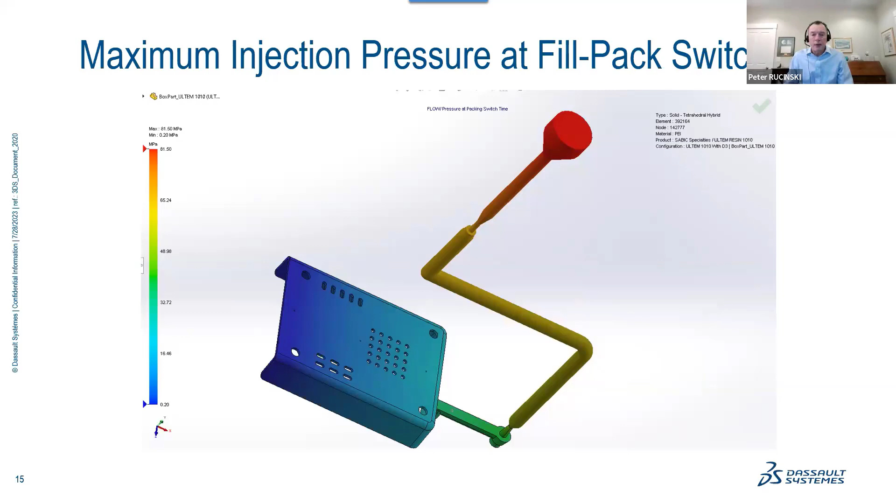If you can accurately predict pressures, you can get almost everything else right. And by everything else, I mean shear stress, volumetric shrinkage, and then maybe ultimately molded part warpage. So here we see an overall injection pressure prediction of just shy of 82 megapascals in the system, and this is at the inlet point, basically at the beginning of the nozzle of the injection molding machine.

But this is kind of the final result of this particular validation study, which again we do intend to take further and deeper into the process with SABIC in the future. You saw a lot of that information that Aditi was presenting on the lengths that SABIC goes through to make sure that, number one, they are measuring for this D3 viscosity parameter, and number two, that it's accurate.

Now, the way I describe this problem, and by the way, when we first ran this validation study, it was what I call a blind taste test. SABIC gives us the part geometry, the material data, and the injection molding process parameters. We have to run all of that through our software and then present the results back to SABIC. And we say, just like I'm doing here this afternoon, here's our filling pattern, here's the weld line predictions, here's our pressure prediction, here's our pressure curves.

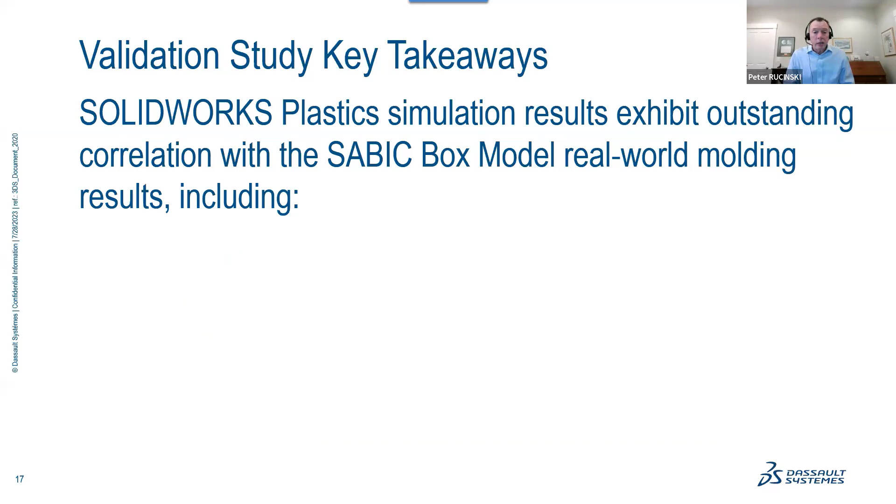So, based on all the results that we look at here today, the filling pattern, the weld line predictions, the short shot series comparison, and now the pressure prediction and the pressure curve, we're all very happy with these results. So the key takeaway regarding the validation study is that for the scope of this phase of the validation study, SOLIDWORKS Plastics simulation results exhibited outstanding correlation with the SABIC box model real-world molding results, including the injection pressure traces, the filling patterns and short shot series comparisons, and the weld line location predictions.

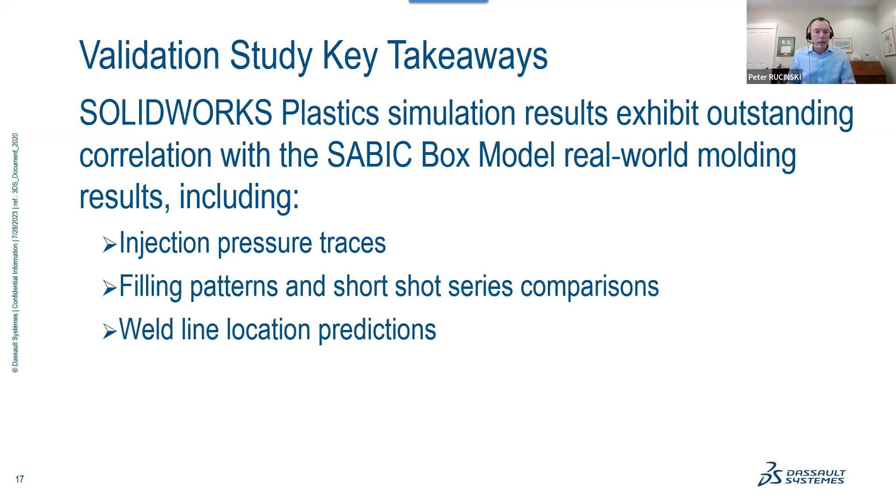So to summarize everything that we've talked about today, I think you can now see that we work very closely with SABIC Specialties to ensure that our mutual customers have access to trusted, accurate, and validated CAE simulation material data. In fact, since we've been working with SABIC, I believe we have added somewhere between 300 and 400 SABIC sourced and validated materials to the SOLIDWORKS Plastics and 3DEXPERIENCE plastics material databases.

So basically, if you go into that software today and pick a SABIC Specialties material, you can have full confidence that that's basically the best data that we can generate, and I'd say that even exists on the planet. I think you've seen just a brief glimpse into their state-of-the-art injection molding laboratory. SABIC spares no expense regarding the testing and validation of their material data, which is done in world-class facilities. I think this is not something to be taken lightly. It's a behind-the-scenes look that the average person in our space doesn't get to see.

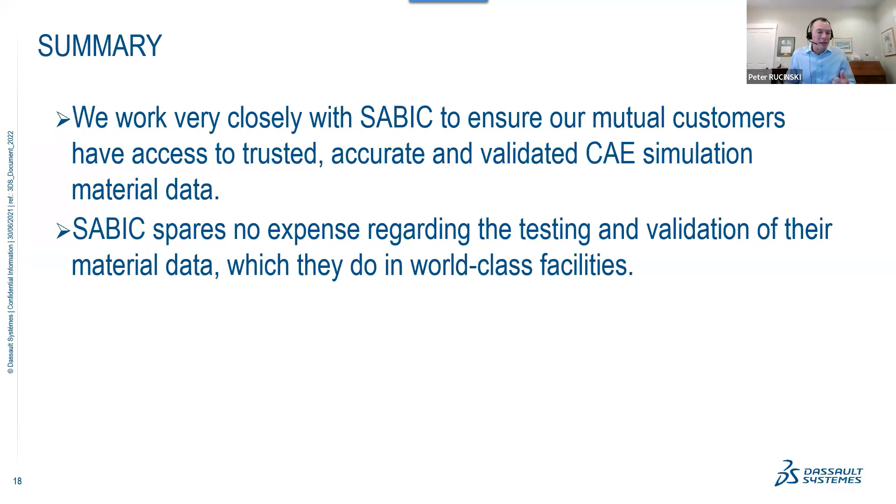But if you ever go into a material database and the material that you need is not there, maybe now you have some idea of what it takes behind the scenes to test and generate that material data in the first place. Basically, not easy and not inexpensive.

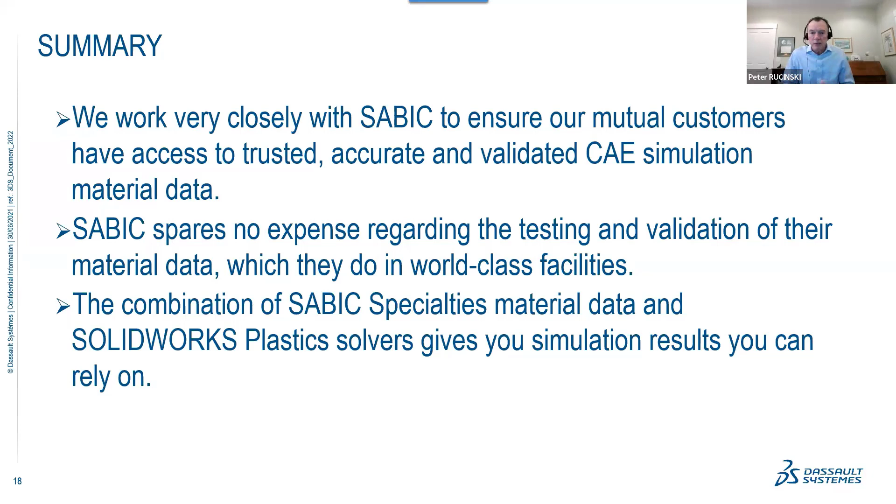And then finally, the combination of SABIC Specialties material data and SOLIDWORKS Plastics solvers gives you simulation results that you can rely on. And this is one of our main goals or objectives here, to make sure that our mutual customers are comfortable and confident in running the simulations, so that ultimately you, our customers, can design and optimize better parts that are more sustainable and that align with the goals and objectives of a plastics circular economy.